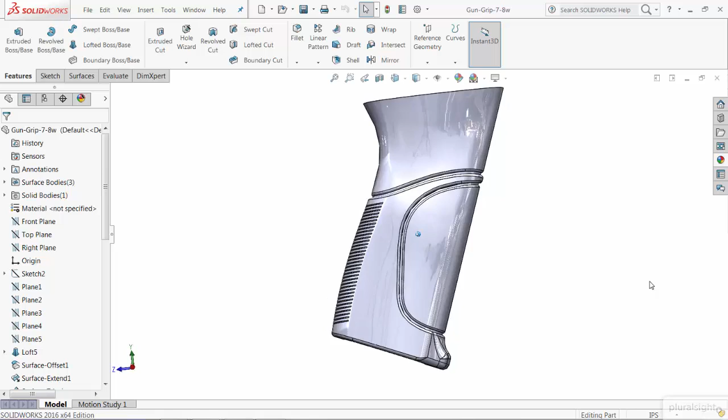For this video, I'm going to be reusing geometry from another part in this part. The first method I'm going to demonstrate specifically avoids creating external references. First thing I'm going to do is mirror this body so that we can see the entire geometry and fit it to the other body.

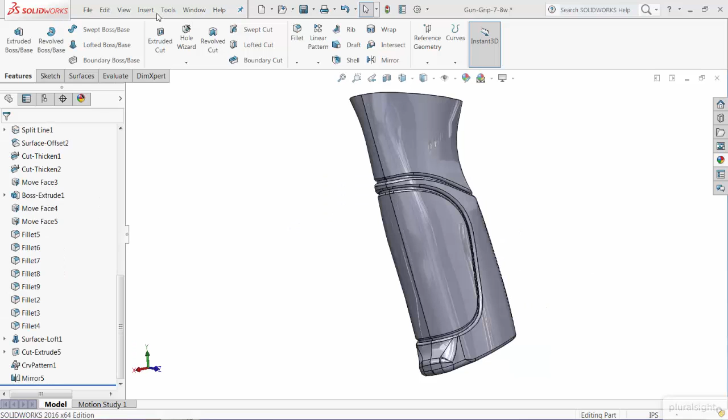So let's take a look at the part we're going to be inserting into this part. So I've isolated only the geometry we want to use, and we're going to insert this part as a body into the other part. We'll go to Insert Part. We'll browse to the file and open it, and then we'll place it at the default location.

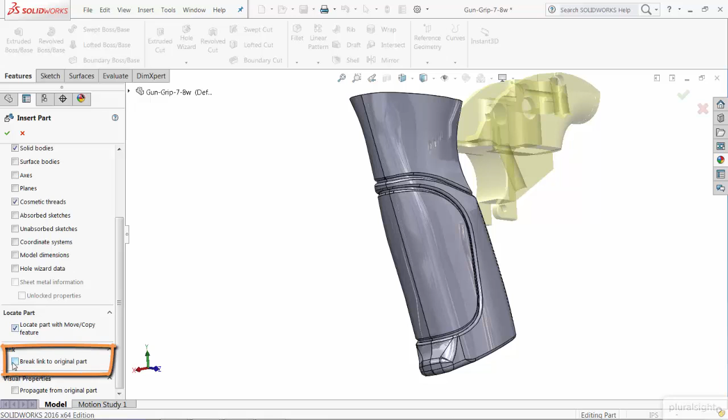And we'll scroll down. There's a couple of options here. The first one is if we want to open the Move Copy Feature dialog box once we accept this. And we're going to want to move this, so we'll go ahead and accept that. The other thing I'm going to check here is the break link to original part. The reason why I want to check this is to prevent any external references from being created.

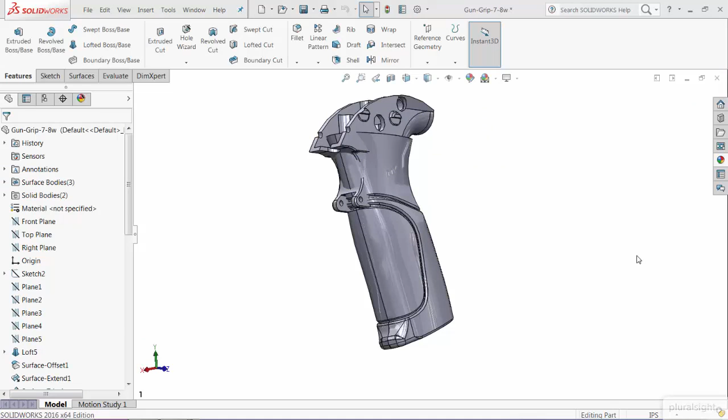Then we'll enter some coordinates to move this body. I have a good idea what will get us pretty close to center. So now that we have the body located about where we want it, I'm going to insert another Move Copy feature to make sure it's centered. We'll go to Insert, Features, Move Copy. I'll select the body I want to move.

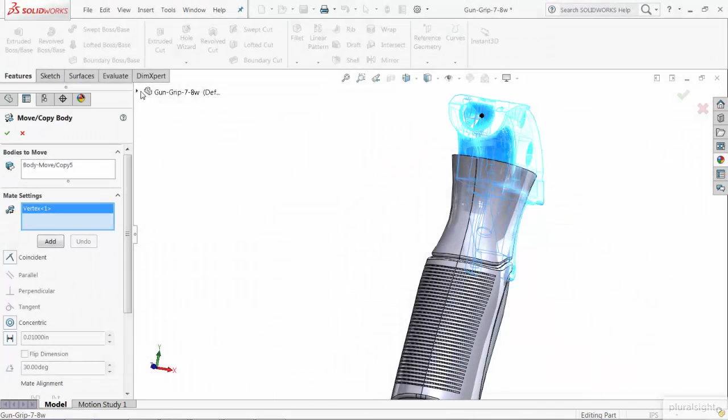Instead of doing a translation, I'm going to do a constraint. I'm going to select a point that's centered on the body and mate it to a plane that's centered in the part. Now everything should be centered properly. The next thing I'm going to do is cut away as much of this body as I can using a cut extrude. I'll change this to wireframe and then zoom in on the geometry I want to work with.

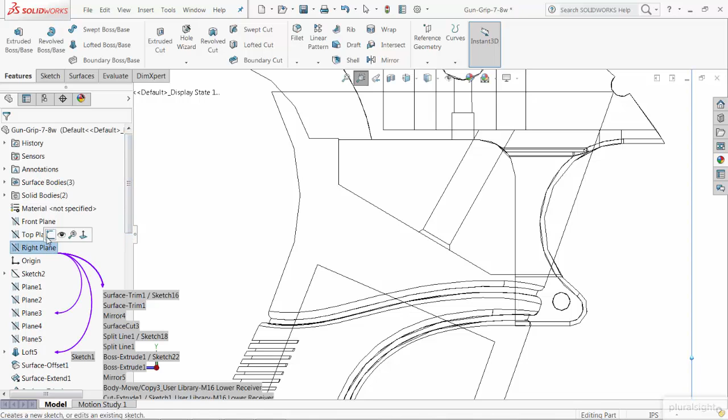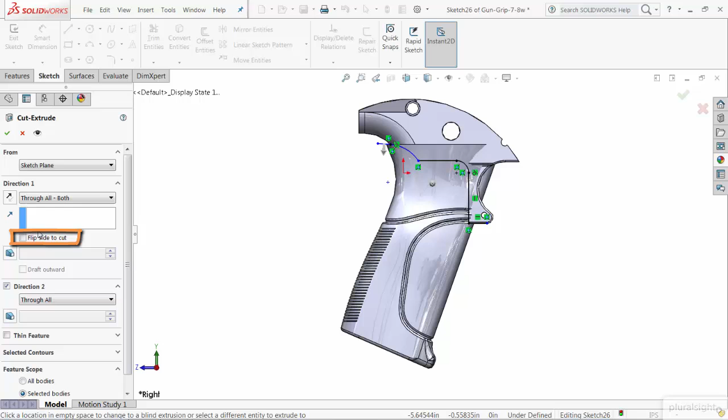We'll start a sketch on the right plane, and I'll use the other body as a reference while I trace the geometry. I'll change this back to shaded with edges, and then we'll zoom to fit, and I'll insert a cut. We'll select Through All, Both. Looks like the arrow is going the wrong direction, so I'll flip the side to cut. And then I'll select the body I want to cut.

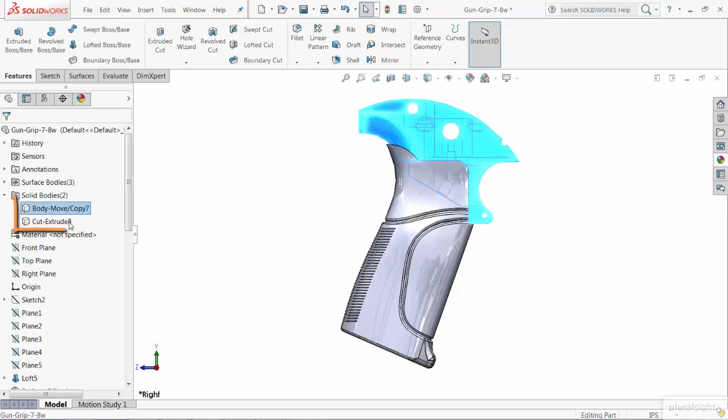For the next step, we want to remove the geometry of this body from this body. I'm going to show two methods of doing that. The first one is through using the Combine feature. Holding Control, I'll select the two bodies, right-click, and select Combine. The first option here is to add the bodies. The next one will be to subtract the bodies. This is the one we're going to want to use.

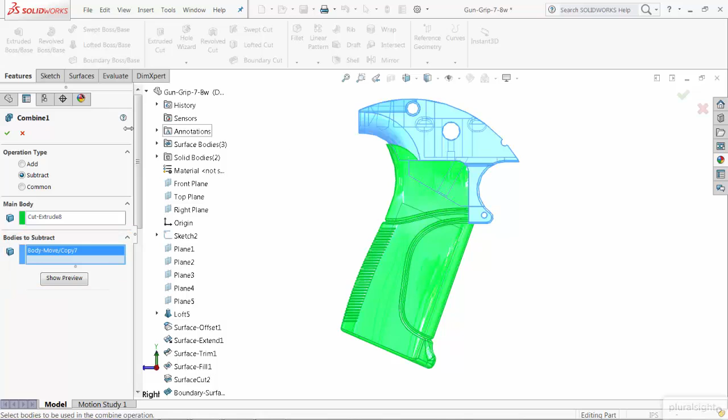I'll go ahead and deselect these options here so we make sure we have the right body selected. For the main body, it's going to be the body I want to keep, which is going to be the handle. For the bodies to subtract, it'll be this body. We can select Show Preview, and you can see the resulting geometry. We'll go ahead and accept that. As you can see, we've removed the geometry from one body to another. I'll go ahead and undo this.

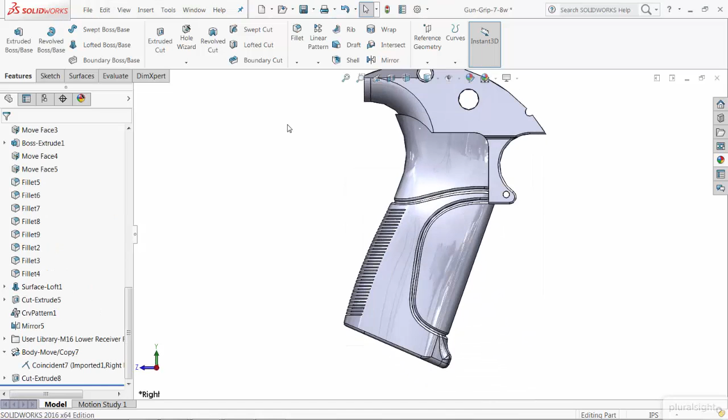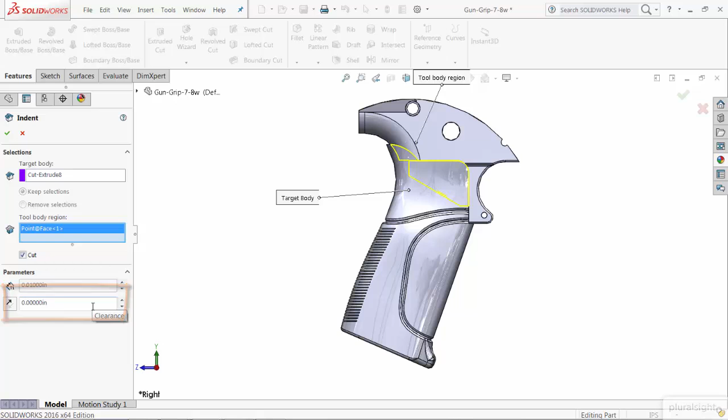This time, we're going to do the same thing, only we're going to use the Indent feature. This allows you a few different options. So in this case, this is going to be our target body, and this will be our tooling body. We're going to want to cut one part away from the other. There is another option here where we can actually add clearance in between the two bodies. For now, we'll just leave that at 0, and we'll accept it.

One of the main differences between this feature and the other one is this one allows you to keep the tooling body, as you can see here. So for now, we'll just hide that and take a look at the geometry we've created.

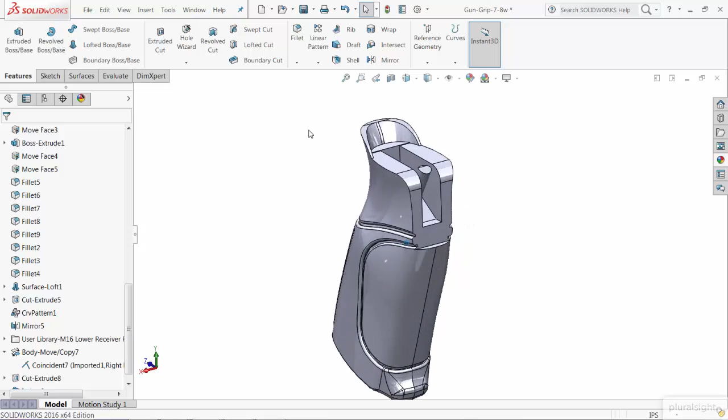Another method I want to show you of removing geometry from one part to another is going to be the Cavity feature. In this case, I have a very similar setup that you saw before, only now we're in context of an assembly. This particular method will create external references. The first thing I'm going to do is edit the part that I want to change the geometry of. This time I'm going to go to Insert, Features, Cavity.

I'll select the component I want to use to remove geometry with. The other option here is to add a percentage in which it would scale the cut from the other part. This is a good way to add clearance if necessary. We'll leave that at 0 and accept this for now. Now if we open this part and take a look at it, you'll see very similar geometry that we had before.

Not that it pertains to this particular geometry, but another feature I want to show you is the ability to join two parts into one within an assembly. For that, we'll start a new part altogether. Make sure we're editing that part. And then we can join two parts together into one by going to Insert, Features, Join. We select the two parts we want to join into one part and accept it.

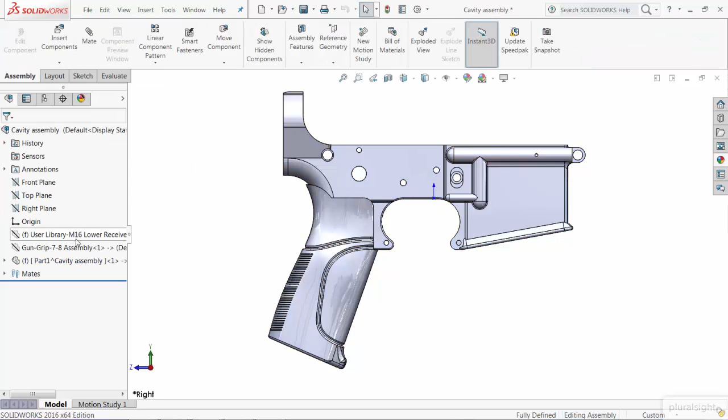We still have our original components, but they now have been hidden. If we open the newly generated component, we'll see one solid body containing all geometry.

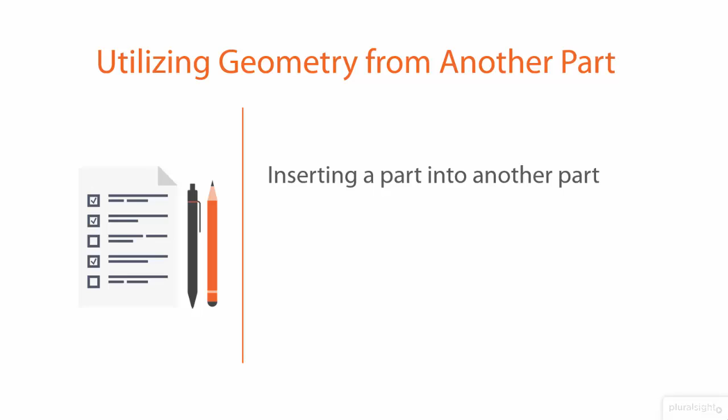Let's take a quick moment to review this session on utilizing geometry from another part. The first thing we talked about was inserting a part into another part and then positioning it using the Move Copy feature. And then we talked about two methods of subtracting these bodies from each other. First, we talked about using the Combine feature to subtract one body from another, and then we went into using the Indent feature to accomplish the same thing with different options.

After that, we accomplished the same thing in the context of an assembly while maintaining parametric linking using the Cavity tool. Finally, we showed how the Join feature can combine components into one part. That's it for this session. In the next session, we're going to be discussing cleaning up geometry using the Delete Bodies and Delete Face features.